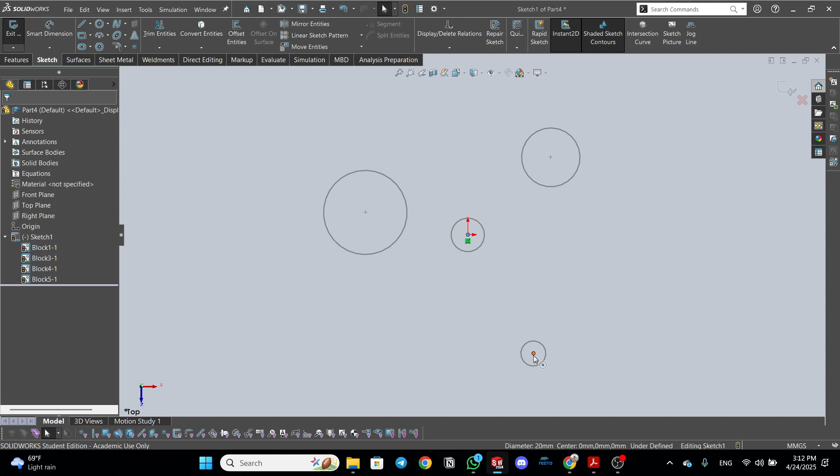So this is wrong, we'll delete it, and make this circle a block, and make this and this too. So let's define the position now and make this in the center line or the center origin point.

So each step of defining the dimension is crucial. If you don't do that, then the question or the answer will be wrong.

I think all of them are fully defined. No, they are fully defined, but they are rotating about the x-axis.

So now let's add the belt and chain. Here we see that the thickness is 15 millimeters. From Tools, Sketch Entities, Belt and Chain, or you can search it, or you can use a toolbar to select the command.

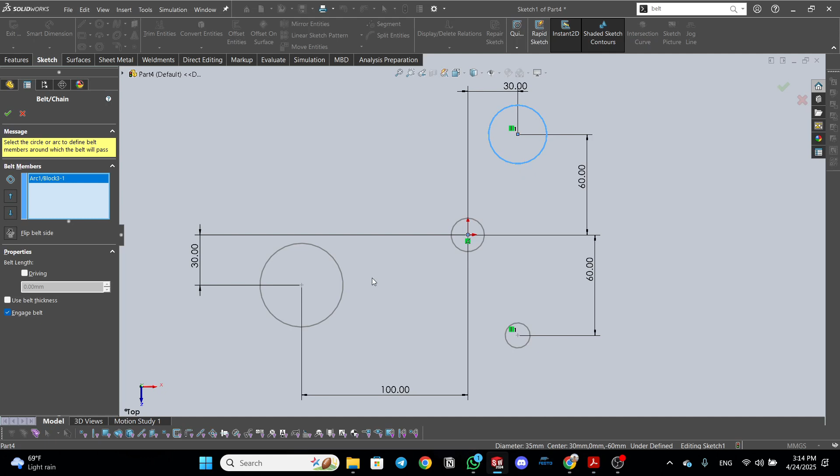Either one is fine. Now we have to select the pulleys, and the arrangement of each pulley is crucial to have the shape of the belt. So this is the shape.

Yes, and we have to give a belt thickness of 15. So this is the first question, and all dimensions are good. Now we have to get the belt length, which is written here, 640.24 millimeters.

Basically, a question could be like that. It is not hard, but you have to know the basics of belt and chains and blocks. So this could be one of the questions.

The second question - before we get into it, I have to emphasize that equations are important. If anyone intends to go to CSWE, they probably passed CSWA and CSWP also, so they know equations and the SolidWorks procedure in all the exams. We have to enter some kind of equation for angle or dimension, and we will use it a lot to modify some parts to make a part easily modifiable.

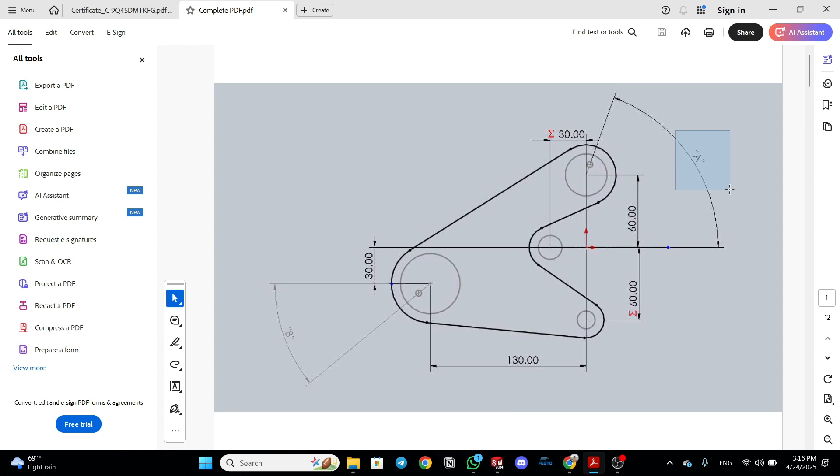See this question - I'm the one who made it, so it is not perfect and doesn't have the best layout like the exam. But I will tell you the idea behind it. If we have this angle, let's make this block, let's modify it.

We have a circle here. The angle is 45. Very good.

So there is a command in Edit Belt which is Engage Belt. Let's make this clear. Make a circle here, doesn't matter where.

When we rotate one pulley, each of the pulleys rotate as well. So when this pulley rotates like a 30 degree angle, this should rotate also a certain angle. We don't know what - it is a ratio between the diameters of the pulleys, but that's not the case now.

We will just determine the angle as the exam said, like this will be A. And we will add a circle in the second pulley, and we'll determine what he wants in the exam - the angle of rotation of this pulley that happens because of the rotation of that one. So using equations is important to know in all the exams.

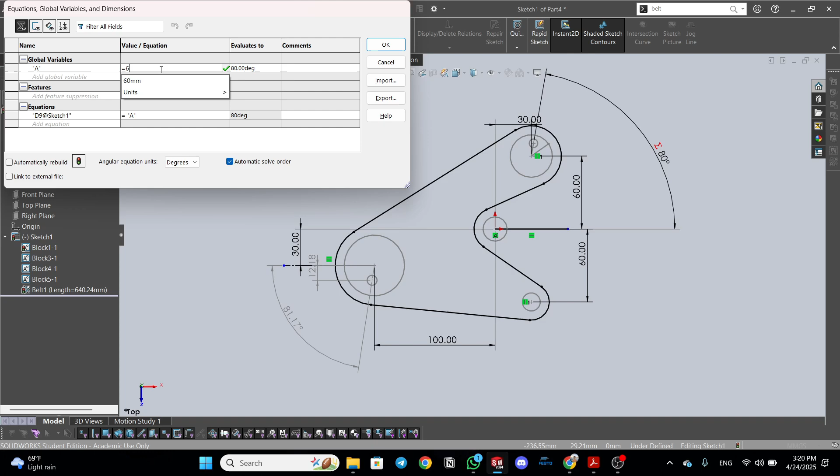Like this will be 80, now it will be 60, and to see the new number or the new angle of B - he will want to know angle B, and angle B will depend on angle A. So that could be multiple questions actually.

Very good, so this is the first question. Let's save it. Whenever you solve a problem on an exam, save it so you can revise it later, or revise your exam afterwards.

So this is question one, or topic one. It is one topic, but he could give you three questions about the same topic.

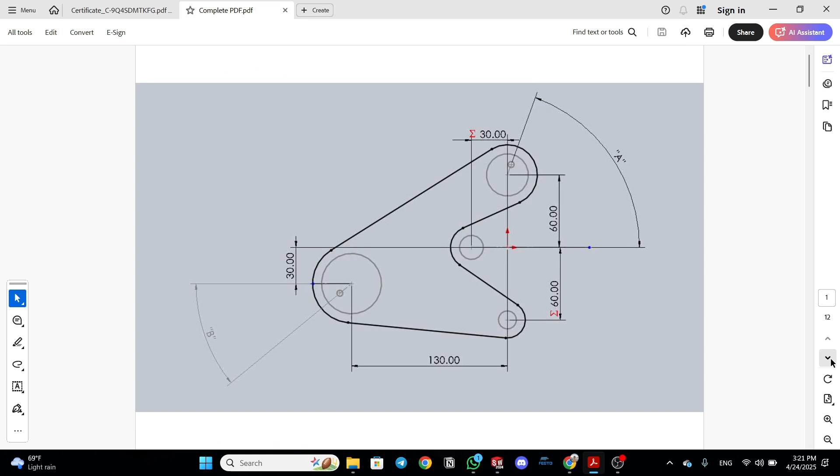So the second question is actually 3D sketching, which I count as hard if you don't know the optimum way to solve it. So let's see the sketch.

So we have a 3D sketch here, the isometric view, and here the top view, side, and front. From where should we get started?

He gives you the dimensions of the back of the sketch, the one on the ground, so we can start from it. I will start with the easier way to solve it, then I'll go to the not so popular way to solve it.

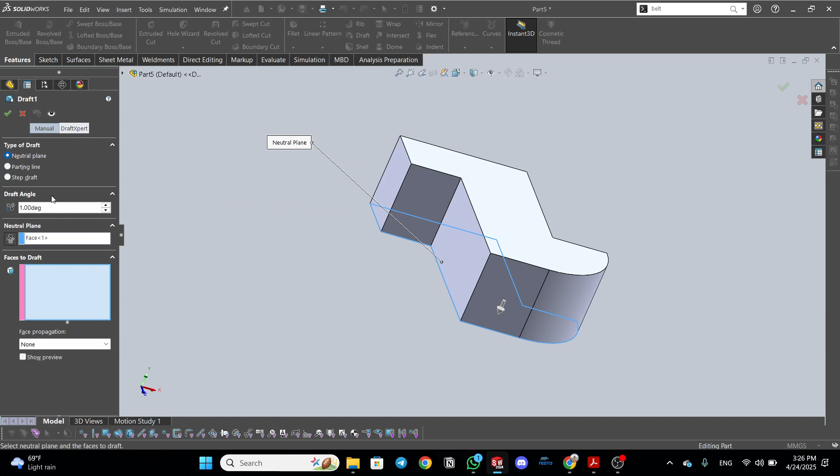This face and that, and the draft direction will be reverse. Yes, yes, this is it. So if we see...

It is perhaps some kind of, it does look like this shape. This is 70 degree if we look from there.

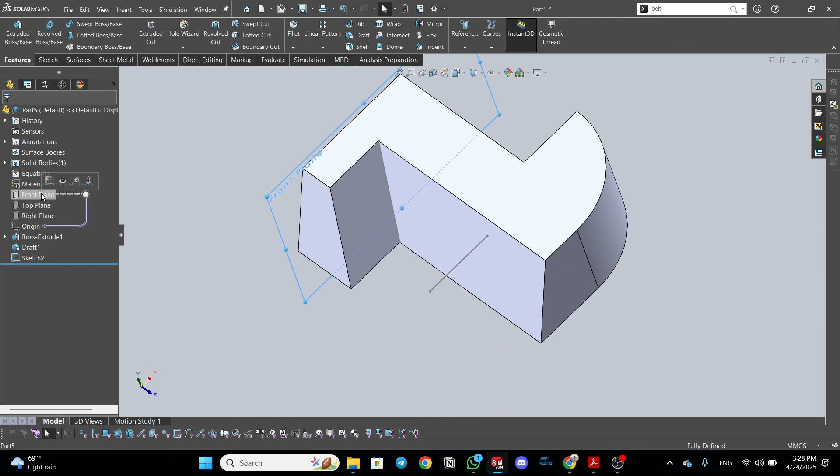Angle in this face - I want to convert that line and that line and see the angle. Yes, it is 70. So if we projected the lines or the draft lines on a face perpendicular, which in this case is the view itself, the elevation view, it will give us 70. So this is what draft makes.

So these are the faces that have inward draft, and the other faces have outward draft. This only face, check - yes, and this straight.

It was 80 degrees, so 90 minus 80 is 10. And the direction of the neutral plane is the one in the back. And the face the draft is this, and the direction will be like this, which will make the draft outward.

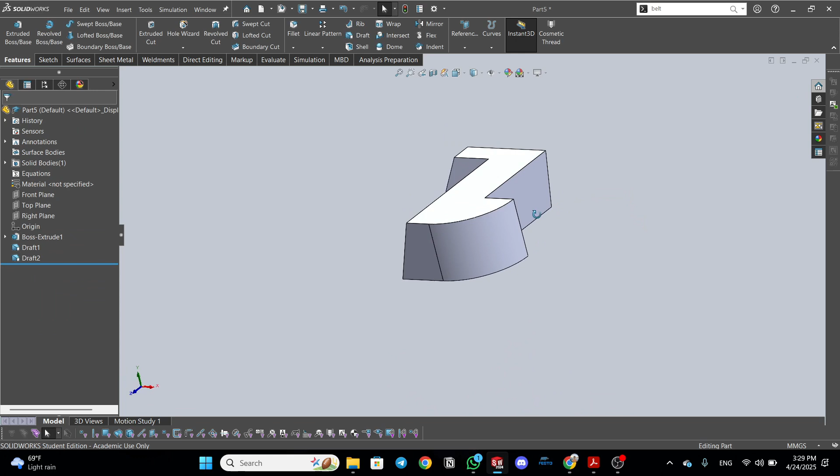So this should be our shape. We have to check. Let's see these angles - this one, convert, see, it is 70, this one is 70, we want to see that one.

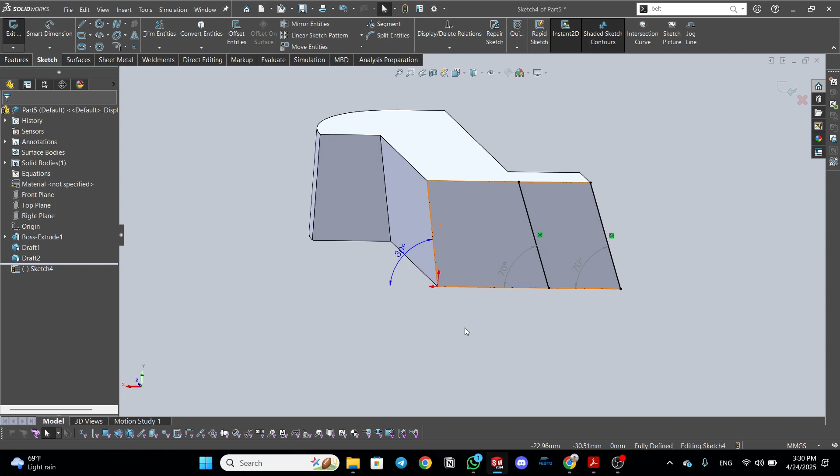It is 80. Yeah, it is correct. So now we checked in a plane perpendicular, or a plane that is equal to this view. The dimensions are correct, so the draft way is good.

If I draw a line in 3D space and want to define it or fully define it, you have to give it a length, an absolute length, and two angles - an angle between the first line and an angle between the second line. So to define each line in this part, two angles and one dimension, it will take a lot of time and is not accurate like the way of the draft.

So to define only a single line, you have to do three dimensions. So it is not the most accurate way.

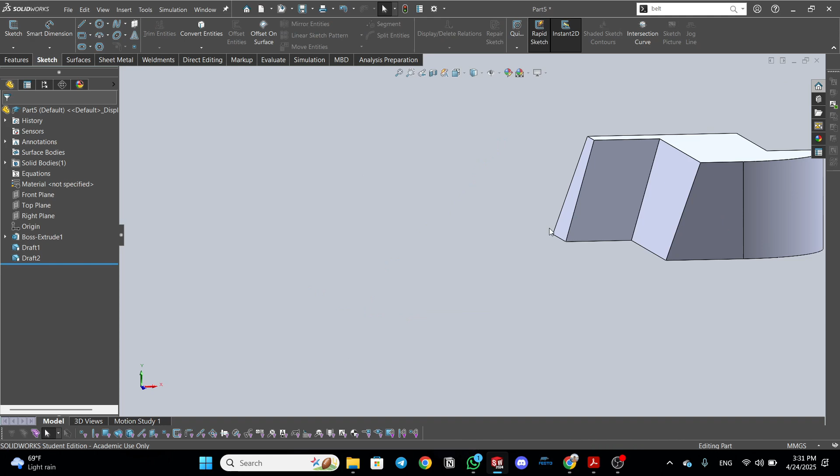Now we have the shape. We want lines, we want only lines. So the lines that represent the question are the edges of this part. So we want to select all the edges and delete the body. How can we do that?

First, we'll open a 3D sketch and want to select each edge - first, second, third, and so on. But this is actually a time-intensive way. There is another way by using filters.

You can right-click, toolbars, selection filter, and put it in any place. There is a filter for edges. You can use a selection box on all of the part. It will select only the edges. But there is a problem. It will not select the edges that are not shown.

So we have to select it again. Or we can just select all, or Control A. It will select all the edges in the part. After we've selected, we can convert these edges, exit the sketch and exit the filter also. So now we've converted all the segments or the edges of the part to a 3D sketch.

Now we want to delete the part from direct editing, delete body, delete, and here we have the shape of the part. And we have validated that these lines or these methods are good by checking the angles.

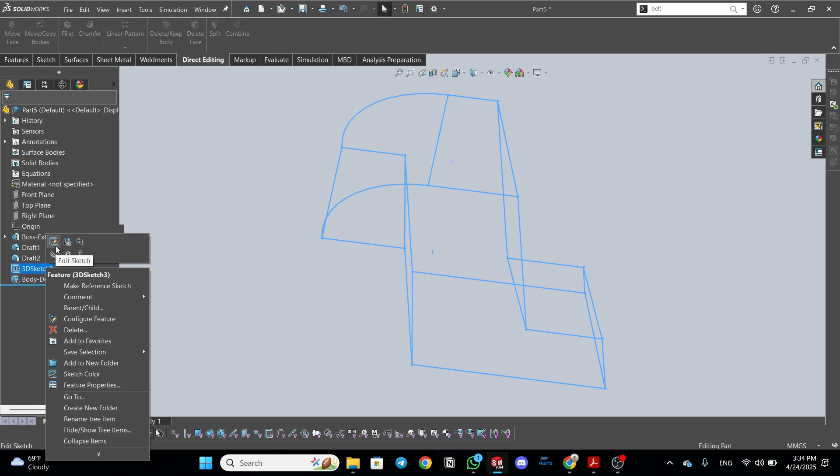Entering the 3D sketch, we can Control A, measure, and here it is, the total length of all the edges. From evaluate, measure. Oh, I have a keyboard shortcut. So this is the total length of all the line segments, 2225. So this is the answer to this question.

So the tricky part of this question is doing it by adding drafts, then converting the edges, then deleting the body, and measuring the length of all line segments. This is one of the tricky questions. So this is a good idea for a question. Let's see another one.

We can add a weldment to the line segments, and he wants us to check the mass of all segments. And there is a cross section, which is a hollow circle or hollow pipe, 20 diameter.

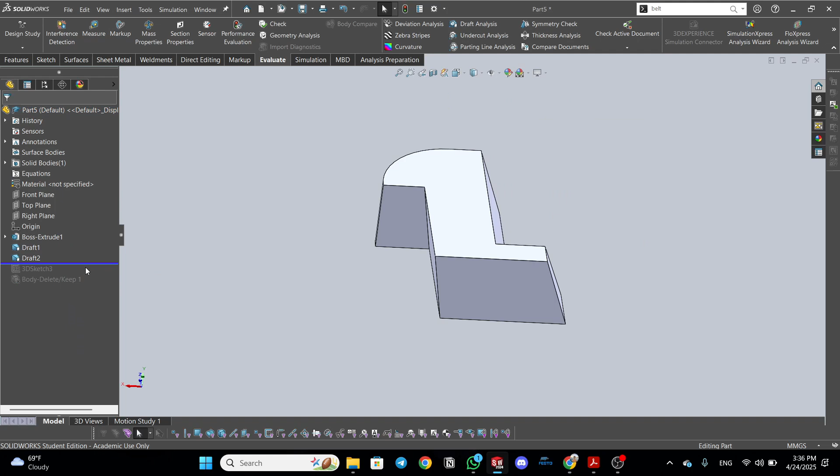So the command delete or keep bodies is one of the commands from direct editing. Direct editing is the tab that has a lot of specialized modifying tools. So we can move a face or move a body or delete a face and so on. One of the commands is that we can delete the body itself without breaking the relations it has.

So it is different from selecting the body or clicking on the body and pressing delete. When I did this, all the relations and dimensions that were related to the deleted part are omitted. It is gone now. So the command delete body deletes the body, but keeps all the relations it has.

So when I press the delete key, the line segments are gone. But if I use delete body, the line segments I had are still here. So all the relations are still good. That's it. I hope this is good. Okay, let's go for the second question.

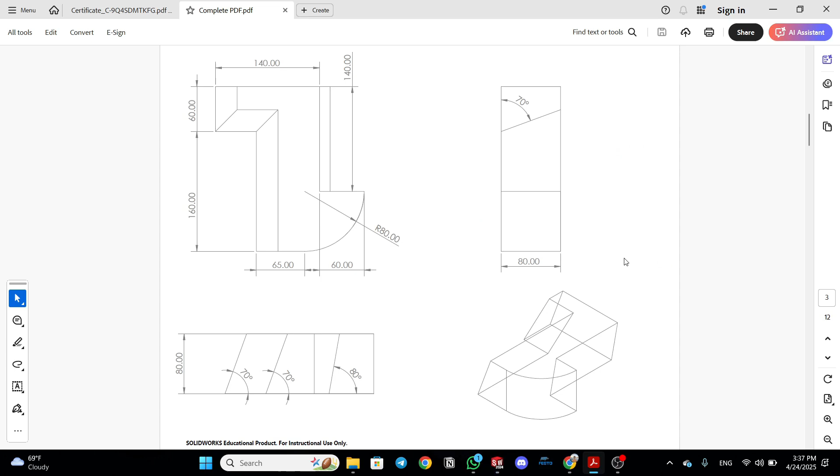Adding weldments. So in this question, he wants us to measure the mass of the part or the mass of all segments, adding a weldment or structural member. The structural member is defined by this cross section. It is a hollow circle or a pipe, 20 diameter, and the inner diameter is 12.

So we have to know how to make a sketch that we can use as a structural member. Anyone who passed the CSWP weldments will know how to do this. But we will redo it. 20, and the other one is 12. And we can add insertion points from there to there.

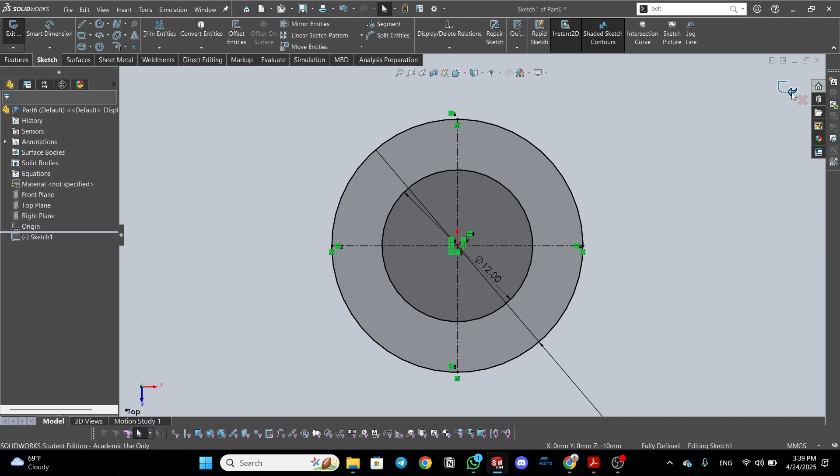Press enter to do the same command. Now we have 5 insertion points. We will need the insertion points when we select the structural member. So the line segment will intersect the profile at one of these 5 points: this one, one of the 4, or the center. So this is a defined sketch. This is the sketch he wants.

So press on the sketch, file, save it as a library feature part. And you have to save it in the path of the design library or the path of the weldment sketches. You can get it from file locations, weldment profiles, and you see the path it has. This path is the default one set by SolidWorks itself.

So you can save it in this, or I customized a path for myself. Either one is fine. If you save a part in either of the paths, it will appear automatically in the structural member profiles. So let's get back, file, save, library feature. It is hard to find. Then I will save it.

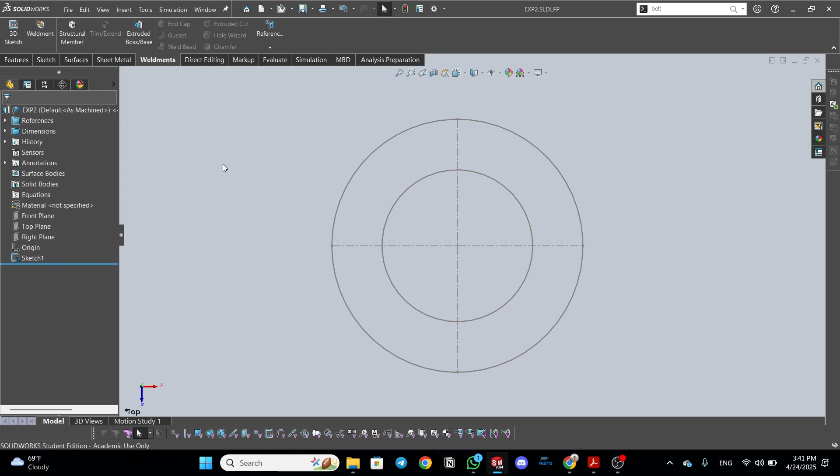Very good. So it is saved now. The extension is renamed, and the sketch has an L sign on. That means it is a library feature sketch, and also the icon here indicates library feature. So let's close it, Control W, and add the structural member, custom profile, metric. It is already used, metric, exp2, and let's use it as it is indicated here.

From all line segments, and this is good. We have to add a material. You can right click, edit material, or you have a keyboard shortcut. And the material it has is alloy 1060.

Now we have to measure the mass of the part. We can from Evaluate, Mass Properties. But we have to check this number because there is some kind of a glitch in weldments. You have to select all the bodies, then measure, then have its mass. So 437.

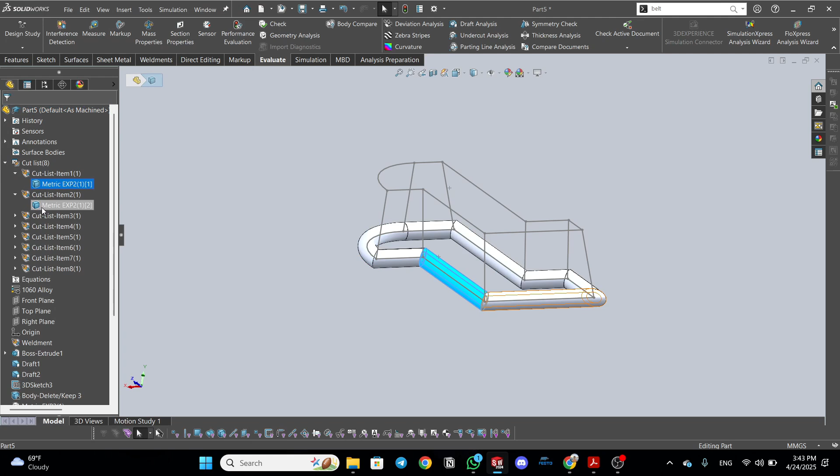Oh, that's correct. But in some cases there is a glitch that the two numbers are not the same. So you have first to check you've selected all the bodies. Either from there, Control, Shift, click, mass properties, and take the number 437, or from cut list. No, you have to select each one from the cut list and so on. It will give you the same answer. So this is the answer of this question.

The second one is he wants to add all the segments, and he tells us that there are three corners that have special treatment. They are all mitered equally between the segments. So in each corner there are three segments. Each corner of the three is mitered equally across the three pipes or the three segments. And we use the same profile.

We can add a new structural member, or we can continue on the same structural member, but it's much easier to control the corners if we are working on the same feature. It is accessible though if we made a second feature, but it is easier to control it on the same feature. So we'll make a new group, select the lines. There are two conditions for a group. The group must have continuous lines, or it must have parallel lines to be in one group.

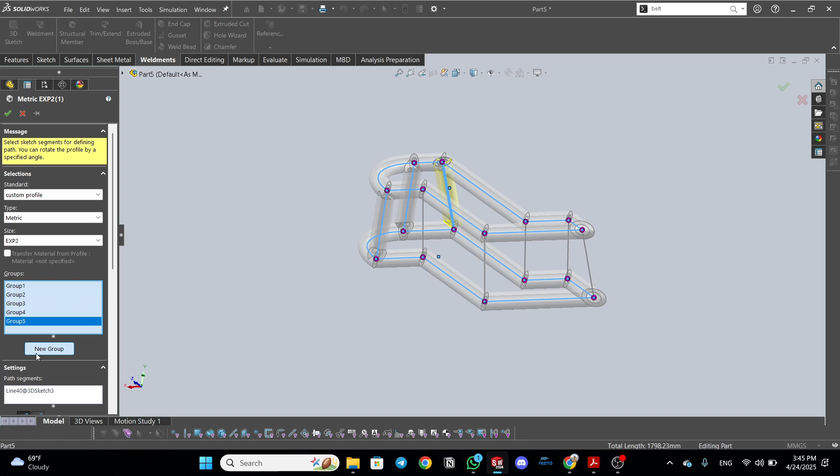So group 3, I can't select another one because they are neither continuous nor parallel. So I'll make a new group for each segment of this. Not all of them. 4 isn't. And this, only this. So these are the line segments. But I didn't control the corner. This one, and this one. So we'll edit the feature again and see the corners.

Oh, no, it is my fault. The group selected is wrong. This one, this one, this one, the back one. Yes, these are the correct segments. Now we have to edit the corner treatment.

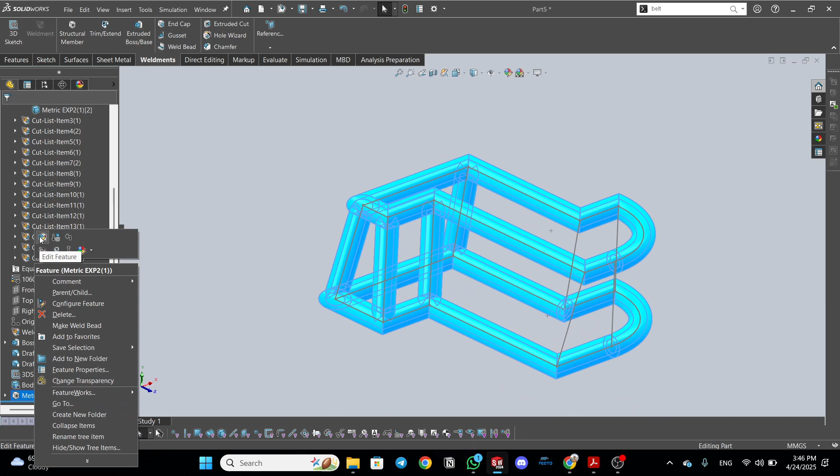So to edit the corner treatment or make it equally mitered, we can click on each joint and specify the corner treatment of each joint by making the trim order equal. Either trim order 1 and 1, or 2 and 2, you have to make it equal. So this is equal. This one is equal. We'll make it 1 and 1. And this one is also 1. So check yes. Now we can see that all of them are mitered equally.

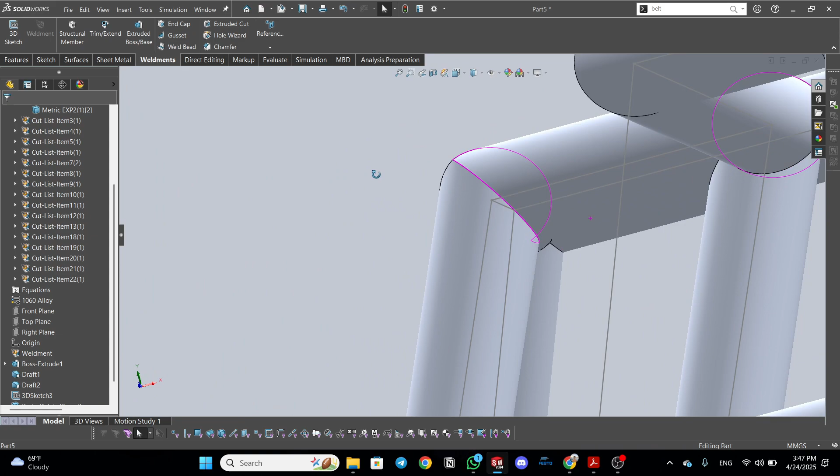Like this. This isn't mitered equally, but this is. This is also. So what is the mass of all segments? Now we can measure the mass. 990. I have to check that. It is the same number, 990 grams. So this is the answer of the fifth question.

So these are the questions for 3D sketch and weldments. It is a good example. And yes, the material we've added, 1060. Very good. So this is another question. Let's see another one, which is modeling a spring.

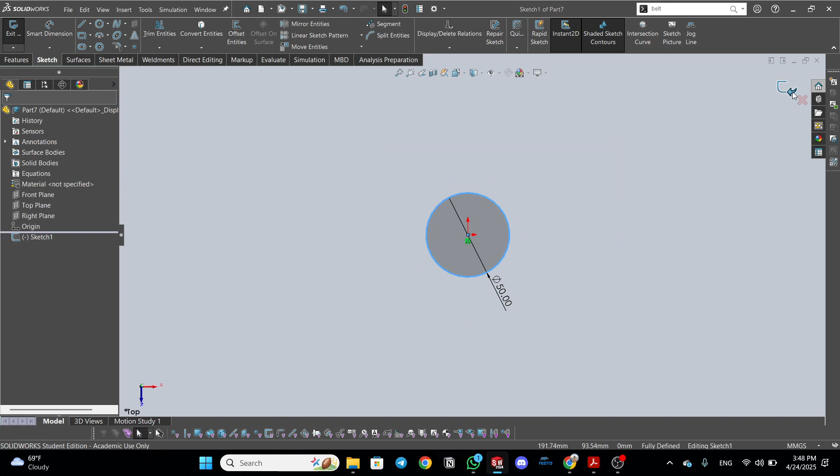So modeling a spring has a lot of ways actually. We can add a circle of a certain diameter, and from this circle we can add a helix by a certain height or pitch. By this way we can make a spring. But in this case we can't make that profile. It is not accessible in this easy way.

We can actually do some modifications like make a taper of a certain angle. Oh, that's too much. Like that. We can make a taper, but it will not lead us to this shape of the spring. So we certainly need to figure out a new way to make it. So let's see.

The spring diameter is 10 millimeters, and he gives us the profile that the spring is constrained to. So this way is called intersection curves. We can make the curve of this spring by an intersection of two surfaces.

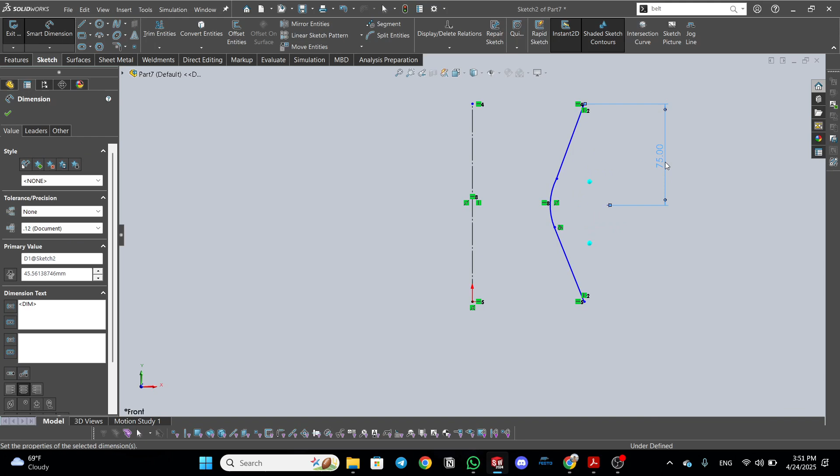So let's see. Here's the center line. Here's, wait, this one is already defined. No, 150. These two are horizontal. Yeah, it is overdefined. And the radius is 40.

The 160, 100. Yes, it is fully defined now. Let's check the dimensions again. It is correct. So this is the first surface we have. We will do a revolve surface.

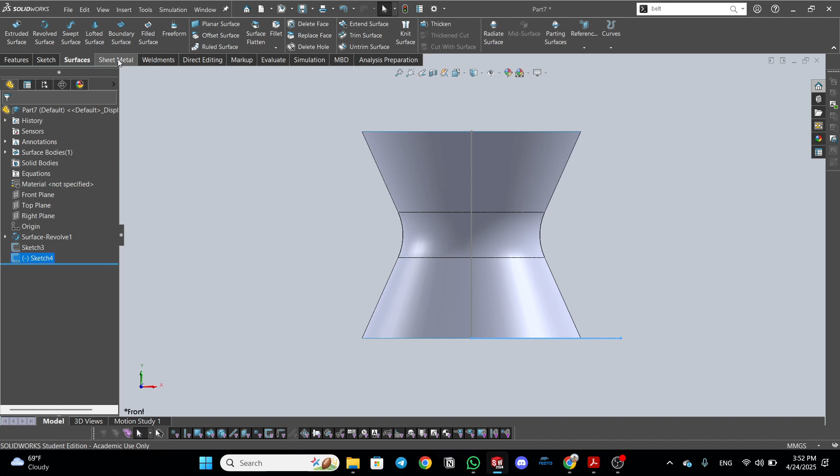Very good. So for the second surface, to get the curve of the spring, we need something that has a pitch that represents the spring. So let's see. We can make a line and another one. Very good. So this is pretty counterintuitive, but I'll make a sweep out of this in this path with a twist angle.

We can specify the twist angle by degrees or revolutions or radians. In this case, we don't have the twist angle, but we have the revolutions. We'll just count how many revolutions are there. First, second, 2, 3, 4, 5, 6, 7, 8. So 8 revolutions.

Oh, very good. So we've made the sweep or the pitch surface, and we made the shape that constrains the spring. Now all we want is the intersection between them. Let's open a 3D sketch. There is a command called intersection curve. We can search for it and see where it is. It is under convert entities.

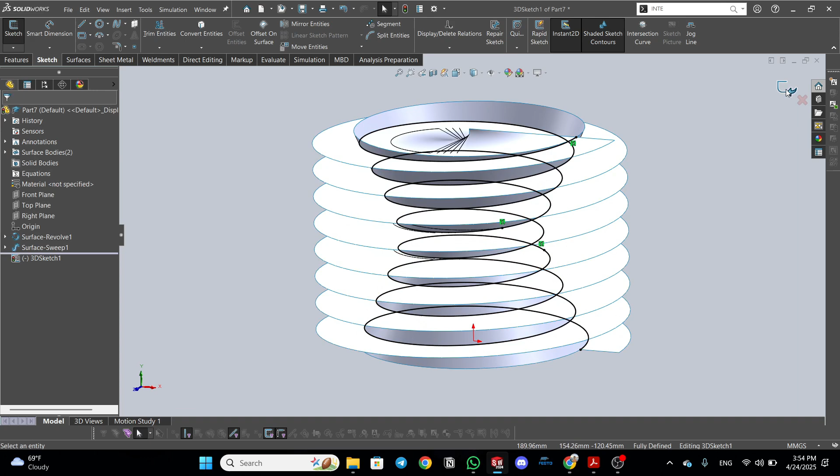I've made a single icon of it, an intersection curve. The first surface and the second surface, I have to check all of this. And here it is, the intersection curve. Now I don't need these; I can either delete them or just hide them. So this is the spring curve. All I want now is adding the profile, a circle 10 millimeters in diameter, and make a sweep.

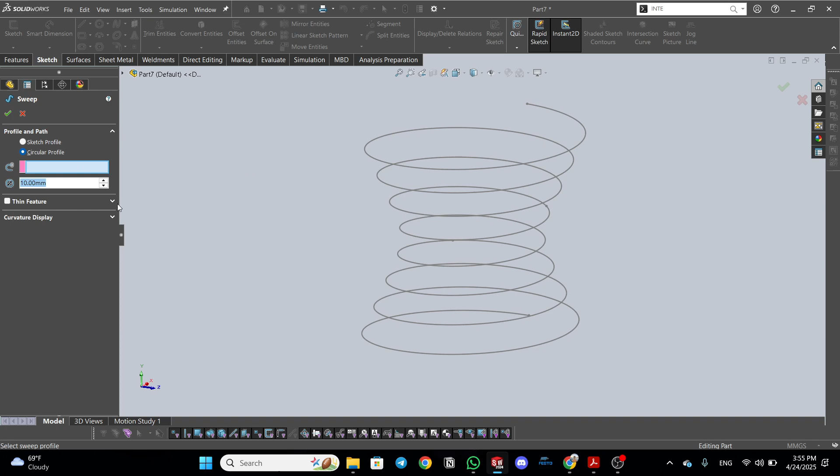This is called shortcut, by pressing the S key, and you can add all the commands you want from shortcut bars. Just drag and drop. So let's add a sweep. We didn't actually draw the profile, but it is okay in this case because there is a separate option for circular profiles. All I want is adding the diameter. Very good. I added the diameter and chose the path, and we are all good now.

So the material, 1020, apply material, and we have to measure. So this is the correct answer. This is actually one of the hardest ways to model a spring. It is good for intricate shapes that you can't do by a helix or a tapered helix and so on. You could make it more complicated by doing a composite curve.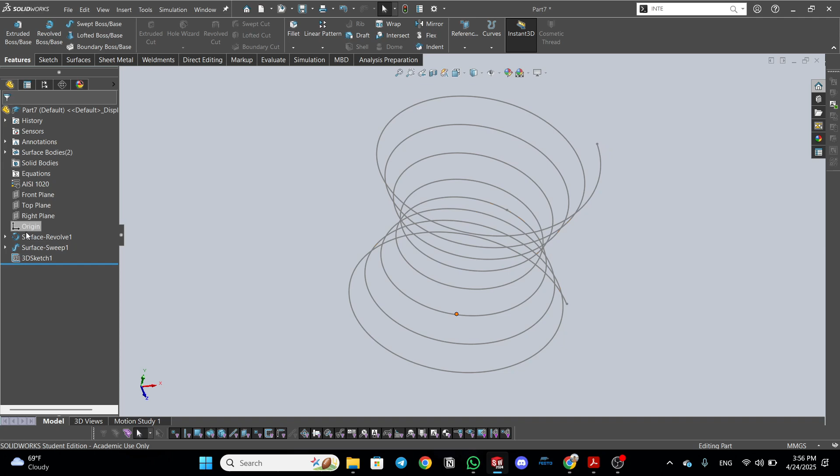Let's leave this for now. By making a composite curve, you sketch on this and add, let's see, a quick example. XY plane, one XZ plane, and add a curve, another one, tangent, and make another one in the XY plane. Very good. And these two are tangent. So this is a separate curve. It is a composite. Let's see if the sweep will do it.

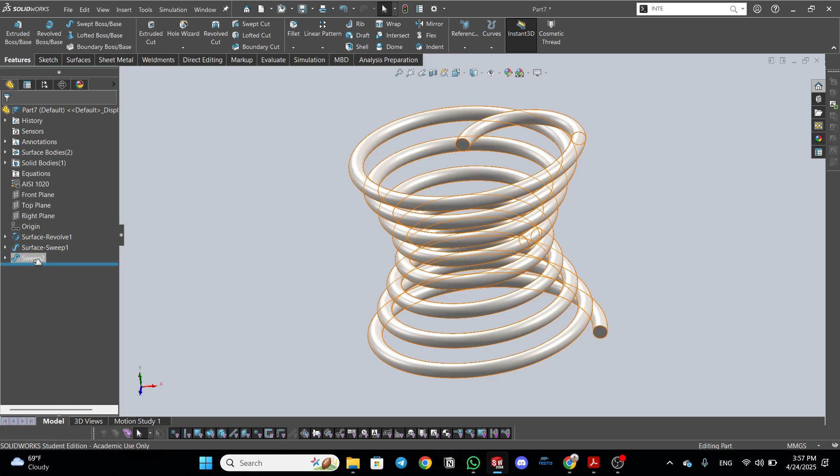So what was the problem? Okay, so we can make a composite curve by adding more curves to the part or to the sketch. If it is a sketch, then it is not composite, but there is a single command, composite curve, that will combine all the curves together. In this case, it is not composite. So this is one way to do it. Let's get back. Very good. So this is our part.

So the next one is sheet metal. Let's open the part and save. The problem here is that the sheet metal is not defined as sheet metal. It is an imported part, an STL or STEP file, either way. So we have to make changes so that SolidWorks comprehends that this part is sheet metal, and this is easily done by the command convert to sheet metal.

First, we have to select the fixed face, which is the base flange compared to the commands we have, and the bend edges we can select manually, or automatically by pressing collect all bends, then pressing OK. Now we have the part defined as a sheet metal part. We know that because SolidWorks can now flatten the part, and we can get the flattened length he wants in the question, X.

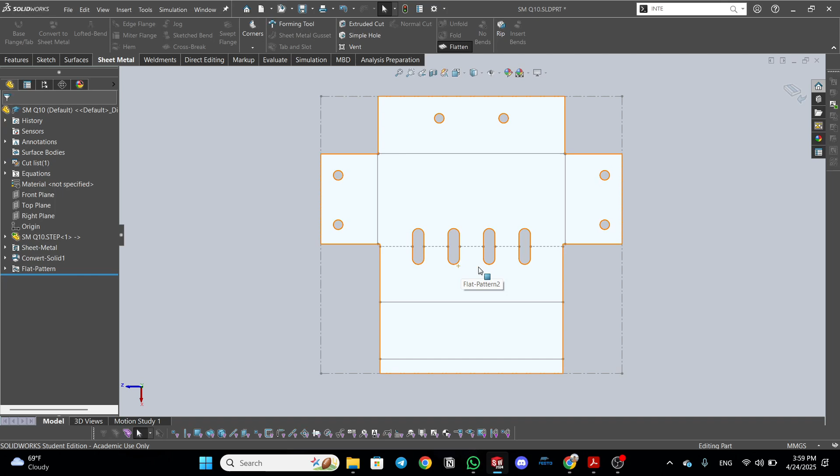So the answer is 288. You can measure it from Evaluate, Measure and click on this, or you can just from the cut list, the sheet icon properties, the length or the width is 288. So let's unflatten that. Let's see the second question.

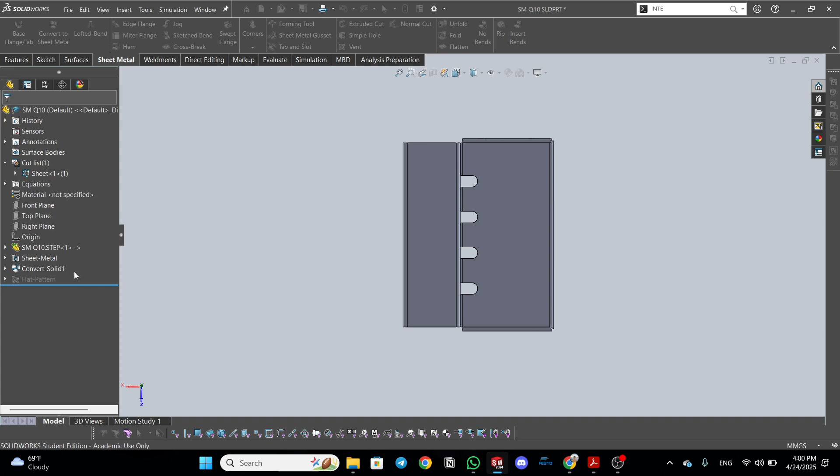So all the trick in this part, we have to, oh, there's an important thing I forgot, is we have to define a K-factor. In the question, it is 0.4. In the exam, it will tell you to put a K-factor of a certain number. And we forgot also to add the material, which is 1020. And this is the correct mass. So this is the first question.

The second one, apply modifications to the part, then determine what is the part center of mass. So if we see there, let's see both views. He added slots here or cuts in the bend, and these slots or these cuts are reduced to 2, so these ones are deleted, and also the width of the cut is reduced. So there are 3 modifications actually. This could be 2 questions, not 1 question, but we will solve it in 1 question.

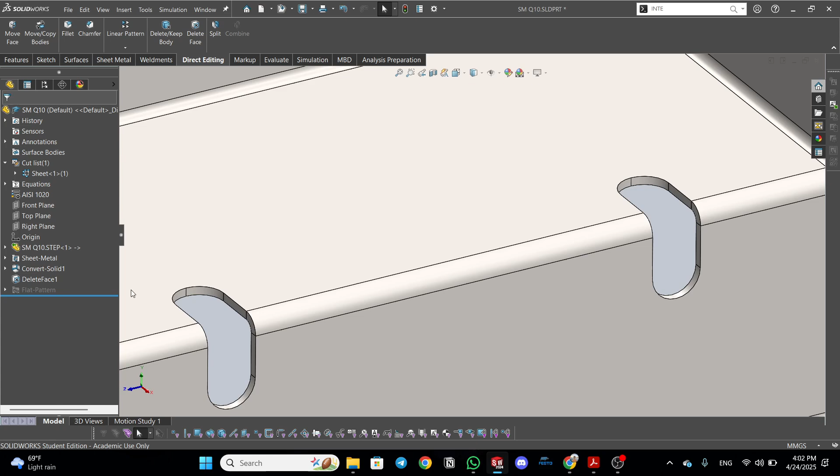So let's start by modifying these slots, deleting and modifying the width. How can we delete this? Let's see. Direct editing. We have a command called delete face. So let's select the inner faces. 1, 2, 3. This is the manual way. There is a command called select tangency, and delete. Can flatten to check if there are errors. There is not. And we can also modify the cuts.

The problem here is that there isn't a feature tree manager coming from this part. This is a STEP file, so it doesn't have a feature tree manager. So we can't go into the feature and edit the feature and reduce the width. So in this case, direct editing commands are a great help. So let's see the move face command. Move face has 3 options, either offset, translate, or rotate. In this case, offset will do the job.

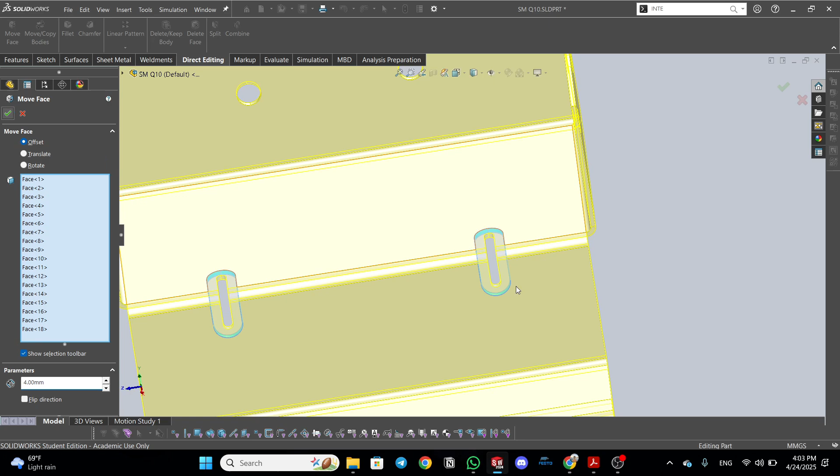Select tangency, and 4 millimeters the width. What was the old width? 12, so it was reduced by 8. Select tangency, so we'll reduce it by 8. Let's see, there is a preview, flip direction, half of 8, because he's reducing 4 millimeters from there, 4 millimeters from there, combined they are 8 millimeters. So let's check the width again. Yes, it is 4 millimeters. So this is the second modification. We've deleted and modified the slots here.

Now we want to add new slots. Rectangle 20 by 10. Let's see how we can add a cut in the bend. There is not a normal plane or a suitable plane that we can cut. So we have to unfold the shape. So sheet metal, unfold, this face, collect all bends. Now we have a flattened shape, but we are not in the flatten command. This is what unfold does. So let's sketch 5 rectangles, 20 by 10.

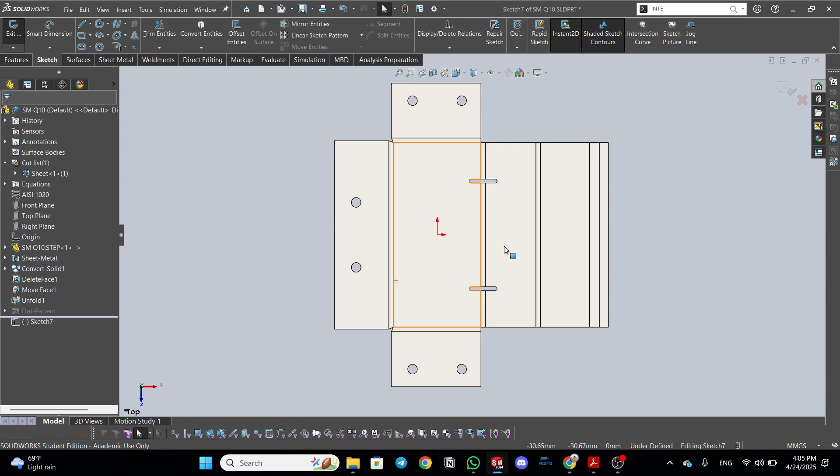And this rectangle is in the center of the bend. The center of it is on the center of the bend, or on the bend line. So let's get the center of this and make it vertical. Very good. Still this dimension, 30. Now it is fully defined. Now we just need to add the linear pattern, 5 instances and 30 millimeters from there.

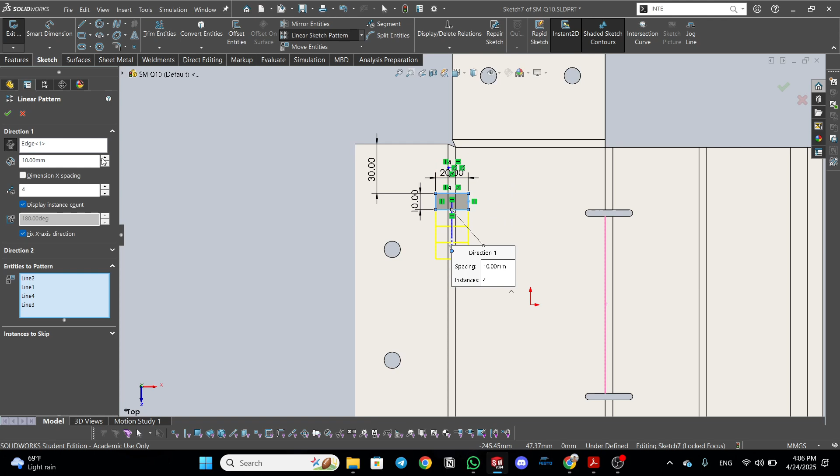Linear pattern. The X direction isn't for us, so we'll modify it. This line, entity to pattern is this rectangle. We can select each line individually, or if we have the shaded contour, we can select the whole area by just pressing in between. So 4, and I will not fix the dimension X spacing because I will define it from the other edge. So this is 30. Now this is a fully defined sketch. We will cut, and we can link the thickness.

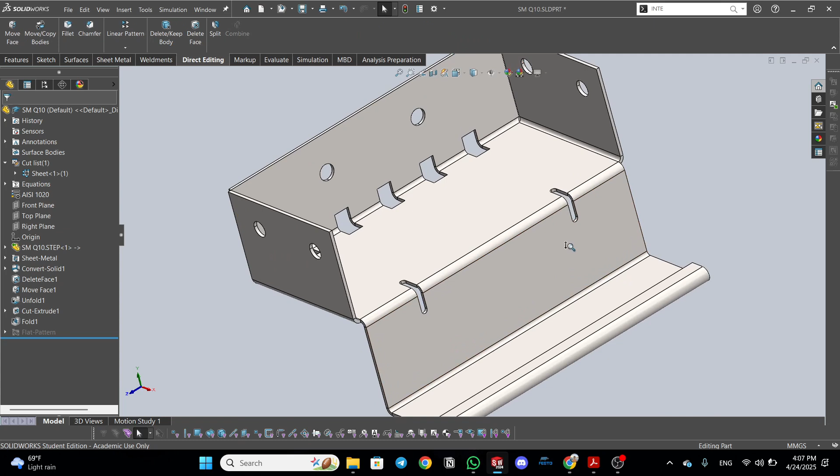Now after we've cut the model, we will fold again. This face is fixed, and we will collect all bends again. And to see if there is an issue, we'll flatten. There is no error, so this is the correct part. So we have to measure the mass, and this is the correct answer. So this question will be easy to solve if you know the direct editing commands like delete face and move face. It will be much faster than any other method. So this is the eighth part.

If anyone was following chess, you will know that meme. The rule.

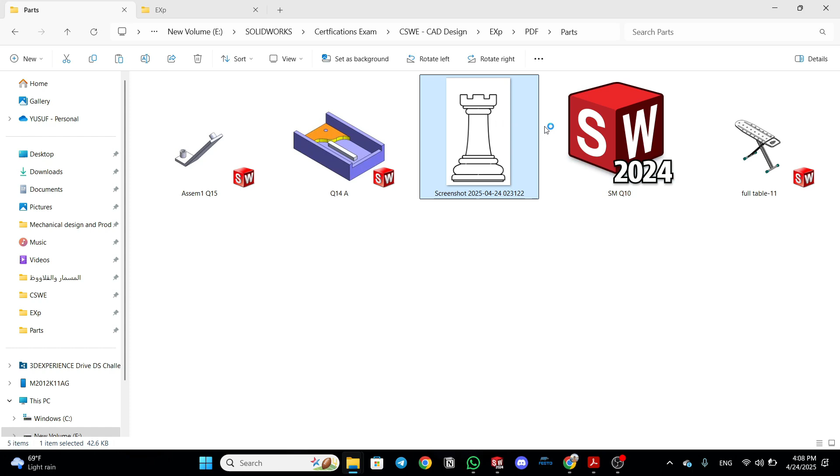So this part is: use the provided picture to capture the part shown and determine what is the mass of the part. So this is a sketch picture command or sketch picture question. The picture is here. This is the picture, and we have to take the shape of the rook and model it on SolidWorks.

And by the way, this is a method used in reverse engineering. It is pretty basic actually, but if you want to reverse engineer a bottle or so, a water bottle, you can take a picture of it and insert it on SolidWorks and make the curves of it.

So we'll select a plane, front plane. We can search sketch picture, and see where is it. I have it, but we can search from tools, sketch entities. It is somewhere there in tools or insert, but I have it here, or you can search it if you don't know where it is located. So sketch picture, we'll add a photo.

And this photo is not scaled, so the program doesn't know any length of this picture, so I have to give it a scale. In this question, he gives us a scale, which is this number, 90.58 millimeters. So this is our scale. This is the scale tool. Put it in the first place here. So this is the start, and the finish will be on the top face of the rook.

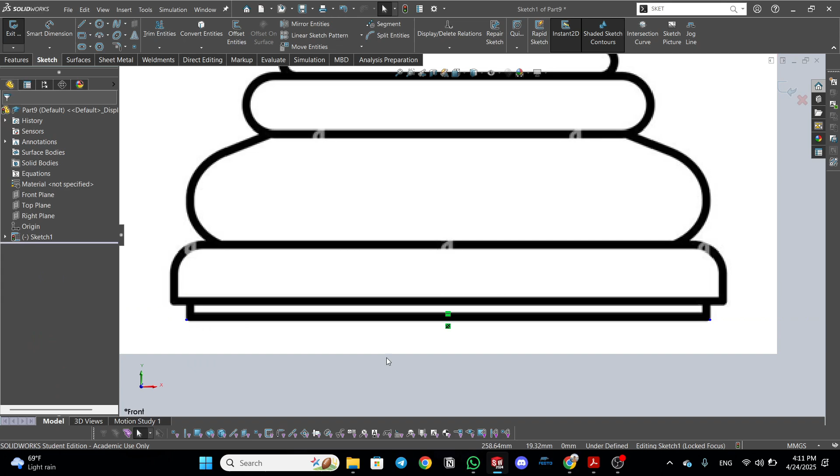We can revolve it because it is a revolved part. We want the center line. Just make a line from there to there and fix it. And the midpoint of it is the revolve center. Very good. I'll just make it fixed on the top.

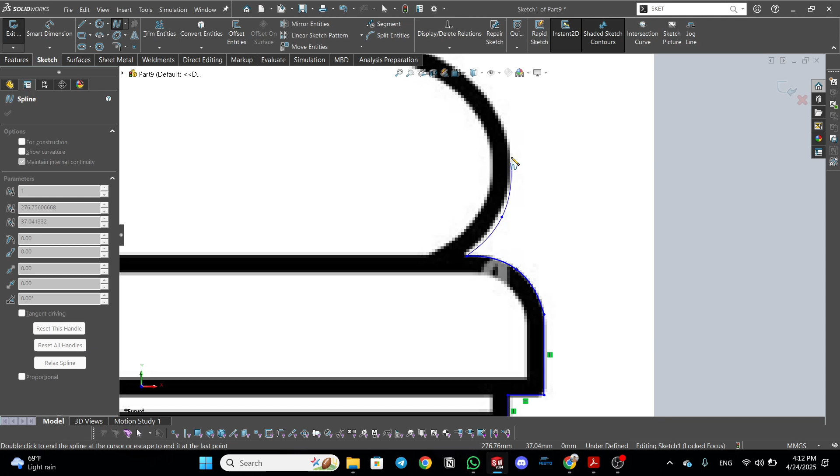So now you'll have to draw on the lines of the picture. Any straight part, you can draw it by a line. And otherwise, you can draw it by a spline. So we'll continue by spline. First one, enter. The second. You have to make sure that you are taking the shape of all the edges.

In this kind of questions, there will be an error margin which is quite large. Normally it is plus or minus 1%, but in this question, because the error is much more, it could be minus or plus 3% or 4% or so. Let's capture this and add a line, make tangent, and this is spline again.

Line. It's quite boring actually, but it is the only way to do so. And here we have a line, and we'll close the shape. And this is horizontal. Very good. So we've closed the contour, and we will make this solid line. Now we will revolve.

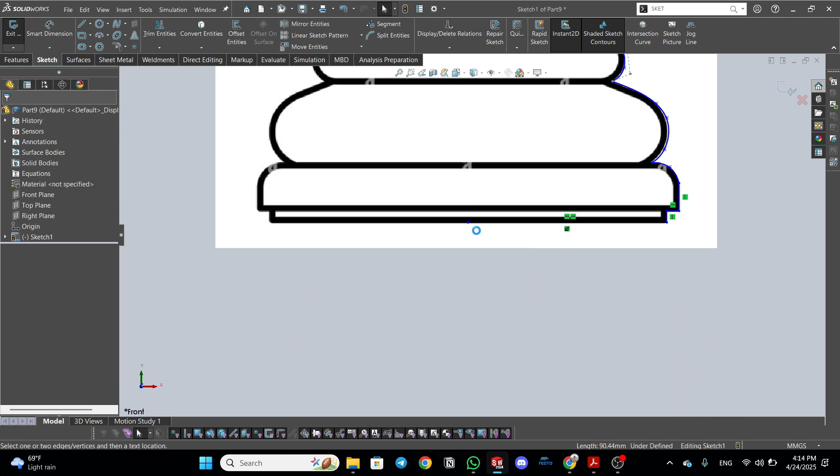Might be an issue. Wasn't an issue. So this is the shape of the rook. Now all that is left is the cuts in the top of it. So it is a rectangle 6.5. We'll just draw on any plane. 6.5. The depth is 5.15, 6.5, and we'll make this in the midpoint

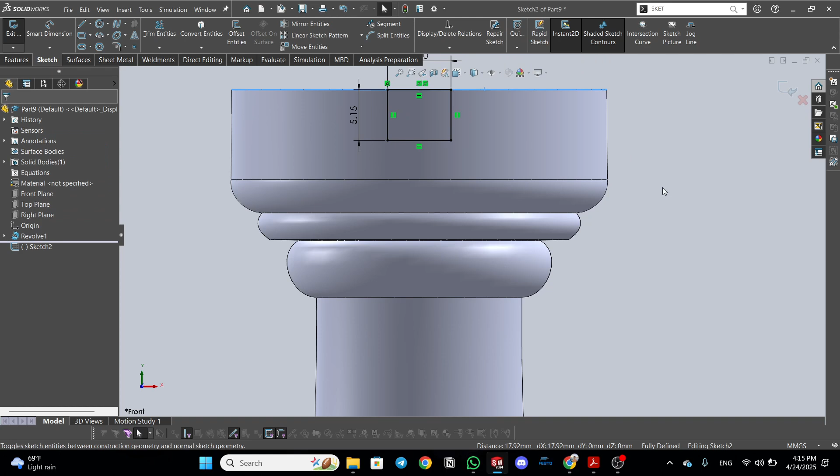of this line. Now we can extrude cut through all, both directions, and we can make a circular pattern of the same feature twice. Doesn't matter. No.

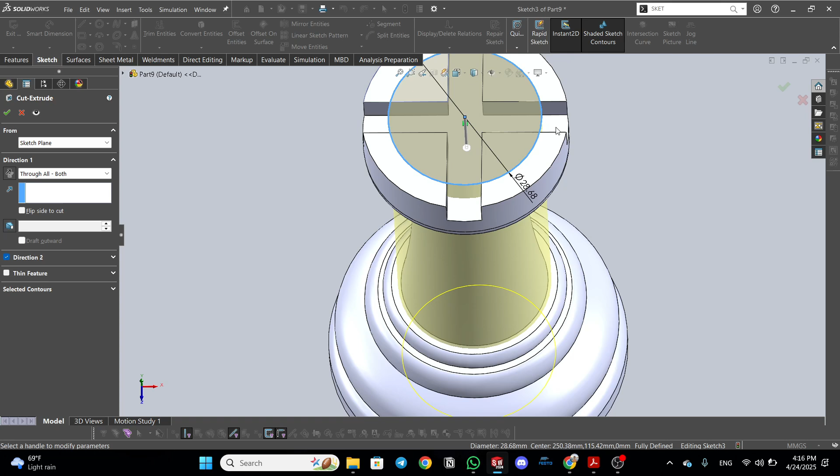Very good. So the last cut is this radius, 14.34. This is the center, 14.34. This is the radius, right? Multiplied by 2. So extrude cut. And we can double click on this surface. It should work. Cut the surface. And this is the final part. We have the rectangle cuts, and we've captured the part from the picture.

Now we can add the material, ceramic porcelain. Shift M, ceramic porcelain. Now this is the final part. We can measure the mass, and this is the correct answer, 190 grams. So this is the ninth question. Still 1, 2, 3 questions left.

Now we have a topic which is assembly modifications. So you have an assembly, and you could make modifications in the assembly as an in-context feature, or just edit the part. So this is what the question is talking about. In this question, the assembly should be provided. You will not model this assembly. So let's open it.

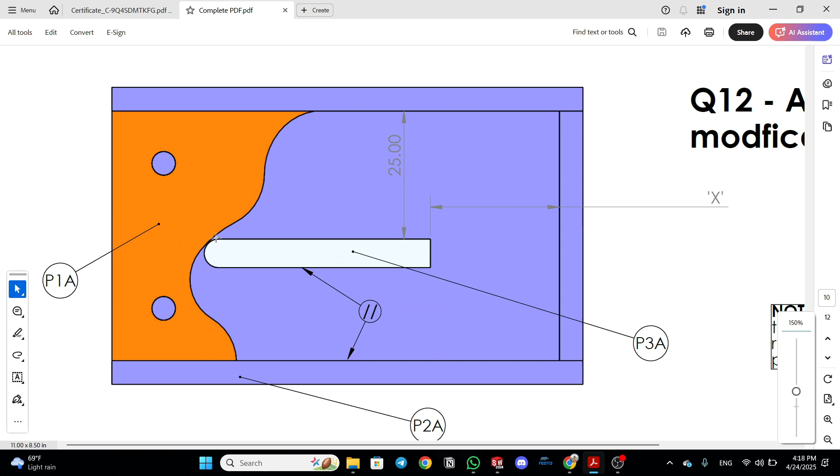Okay, so let's read the question. It tells us to make the circular face, indicated as P3A, always tangent to the faces mentioned. These are the faces mentioned, the yellow faces. P3A should follow all the tangent faces, which is indicated by yellow, on P1A.

So what is the problem now? If we get into the assembly, there aren't any mates. So first we will make the mates: coincident. And he tells us that these two faces are parallel. So I can move it freely.

I want to make this face tangent to all of these faces. There might be two solutions. CAM, which is not a valid solution, because mechanical CAM requires a CAM path which is closed, but this is open. So we can select CAMs, and it will not select because it wants a closed entity.

So the other way is making it tangent, but we can't make it tangent to all the faces. We can make it tangent to just a single face, either this. Oh, this is not. We have to make it fixed or fully defined.

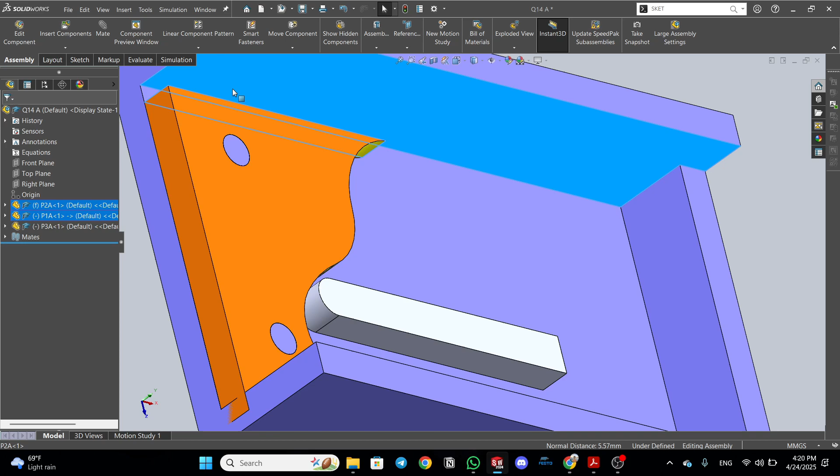These two faces are coincident, so it is fixed. Now we can move this. It is following the path, right? But whenever it gets into the second face, it will not move it. It will not be tangent to it.

The same thing if we make a tangent mate from this and this, it will also not follow all the paths. So what is the solution? One of the solutions is making all of these surfaces a single surface.

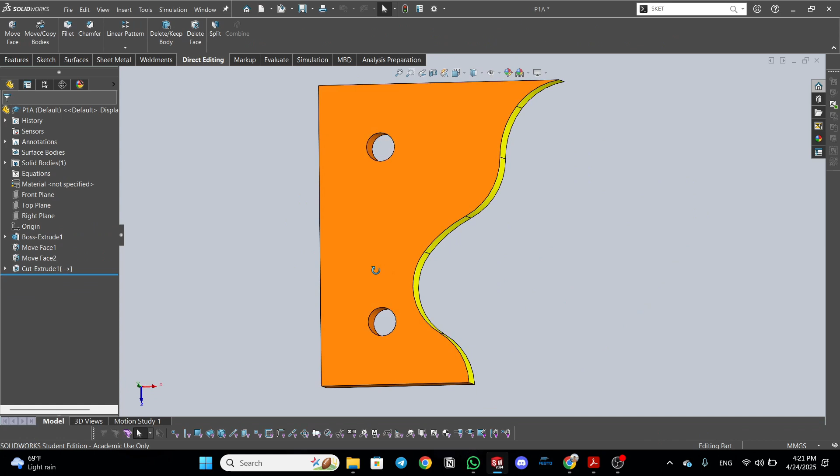Let's open this part, and we can edit the part in the assembly. Either way is fine, but I will open it. So I want to make all of these surfaces a single face. Let's experiment with this command, delete and patch, and see what it will do. It will not; delete and patch fails in this case. So it will not be valid.

So what should we do? There is a way to do it. Let's open the sketch itself. So there are different faces, or there are multiple faces because there are multiple segments in the sketch—this segment and so on. So that results in multiple faces.

So one answer for this is using the fit spline command. Fit spline makes multiple segments into a spline, which results in a single segment. Spline is a single segment, and you can make any segment a spline. So spline will do the job for us. Close the spline—it is not closed, it is open.

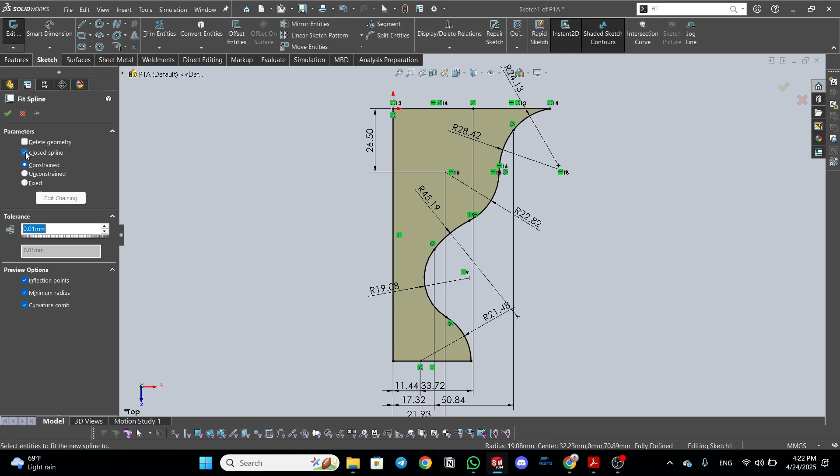We'll just select all the segments and click yes. Now we can see, if we click on it, that this is a single segment. Let's close it and see the face. It is now a single segment. Let's make it yellow.

So let's get back. Now, if we make the tangent command again, let's see if it will be okay. Very good. So it behaves the way we want.

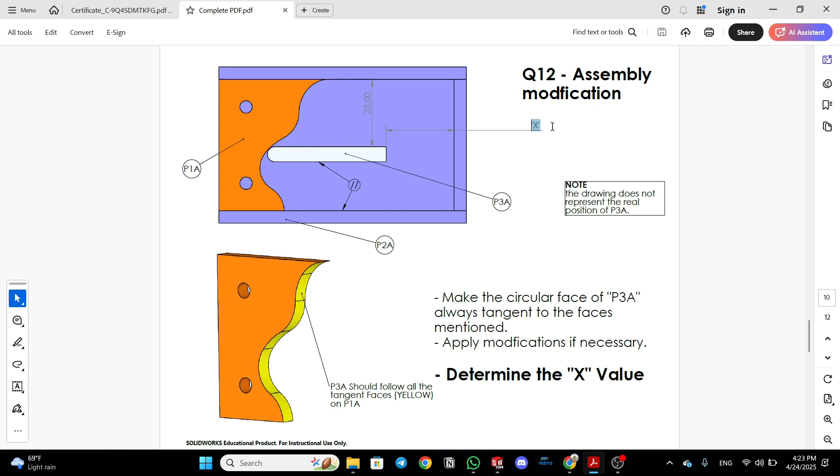So what is the question? There is a condition here: this face and this face have a dimension between them of 25 millimeters. Whenever this happens, check the value of x, the dimension or space between this face and this face. And he tells us a note: the drawing doesn't represent the real position of P3A. So let's see.

This is easy because we can add a mate between this face and this face, which is a distance mate, 25. And let's see from there. It is not in the same position, yes, and he tells us that it is not in the real position. So the assembly is fully defined.

Now we can measure the x distance it gives us. Evaluate measure that face and this face, and the answer is 29.6 millimeters. So this is one of the ways to solve this problem.

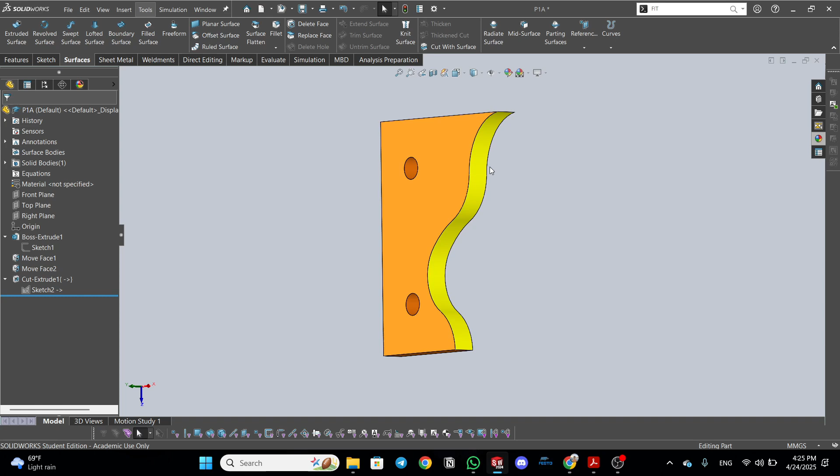There is another way, by doing surfacing, deleting the surface and redoing it by surface commands, boundary surface or fill surface. Either one will probably do well, but this is the fastest way, by using fit spline. So let's close this, don't save.

Very good, let's see another question. Assembly in context: sweep a hollow circle in the spline shown. Determine the mass of the pipe. So this is also a provided part.

We have to open it. Ah, so there's part, second, third—they are all mated together, or they are already made in the assembly. This sign indicates that these parts are in-context parts. They are made on the assembly, top-down assembly.

So let's see. There is a spline that is connecting between this cylinder and this cylinder, and we want to sweep a hollow circle on the spline shown.

Okay, let's get into the part. We are drawing, or we are making a part in the assembly, so we should make a new part on a plane, the front plane. It is in the middle. So: insert component, new part on the front plane.

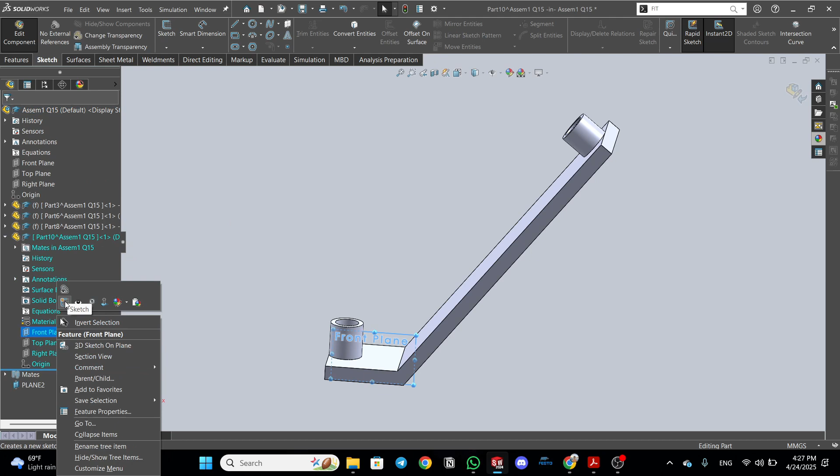So we are opening a new part, right? Yes, we are in the edit feature command. So we are in a new part. We can make a new part in the assembly: front plane, sketch. Where we should make this hidden, either by hidden lines or a keyboard shortcut. Either one is good.

So let's see. What's... oh, I hid the part accidentally by pressing tab. Okay.

Let's spline from this point to this point, and we can modify the handles.

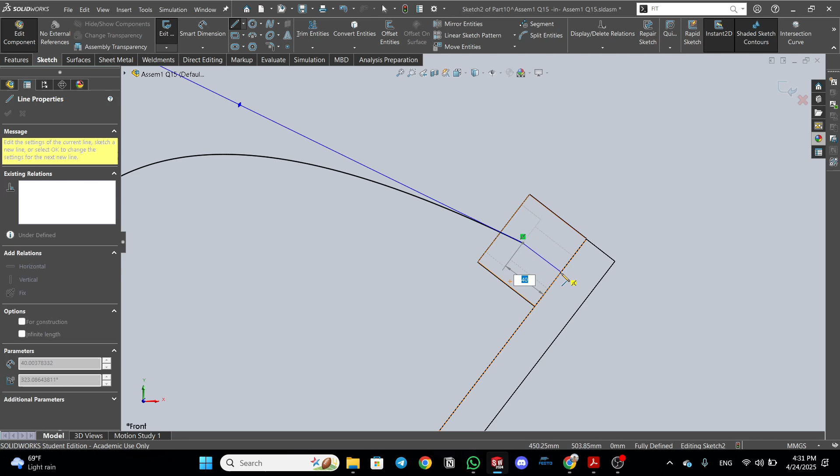But let's continue constraining the spline. This is tangent, it is shown here. If it is tangent, the spline is tangent with the axis of the cylinder, and here is also tangent, and the handle has a dimension of 500, the magnitude handle 500, and the only constraint left is the length. It is defined now.

Less than that, not perpendicular. It is defined. So I don't really know what was the problem, but it worked now. I didn't do anything different. So the spline should be defined.

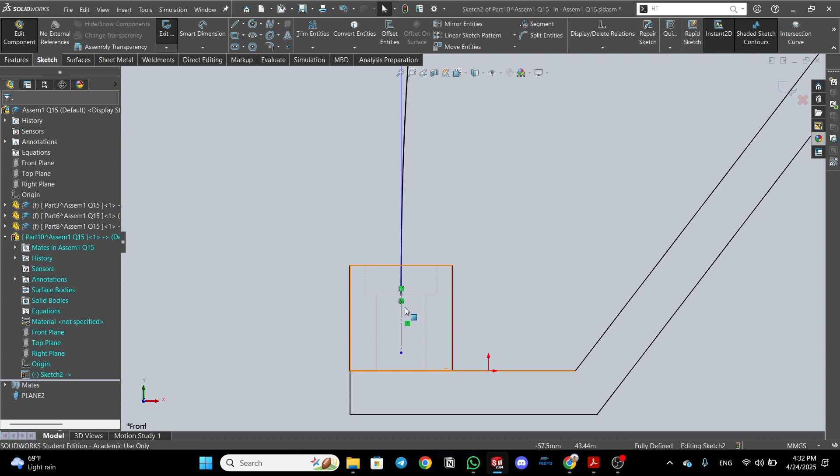So all he wants now is sweeping a hollow circle on the spline shown, and the hollow circle dimensions is the internal feature of this part. So let's draw, make a plane on this point perpendicular to the spline, and sketch on it.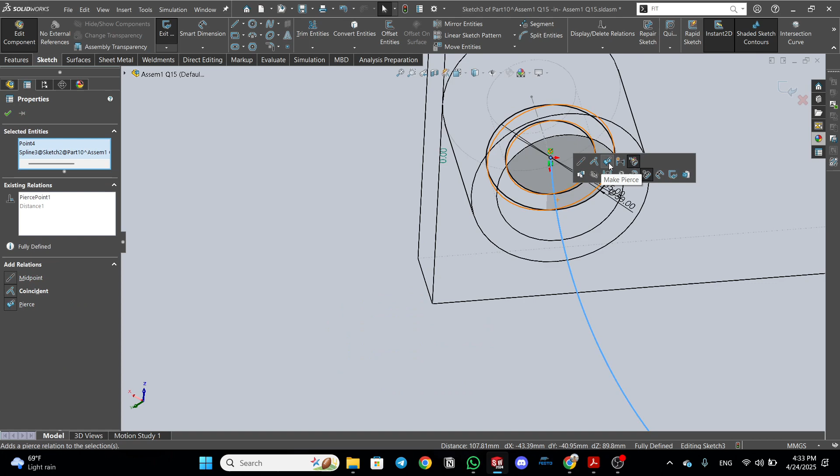Where's the plane? And sketch on it the circle. Here's 50 and 35, 50 and 35. And we'll make it a Pierce relation now. They are not concentric. These two are coincident, and this and that line are the Pierce relation.

This is good. Now we will do sweep, feature sweep, this path on the spline. Very good. Now let's get back into,

this is not tangent, it was tangent. It is tangent. It is modified now, I don't really know. There's sometimes when SolidWorks glitches, I don't know the reason, or no one knows actually, but it somehow behaves like that. Control B.

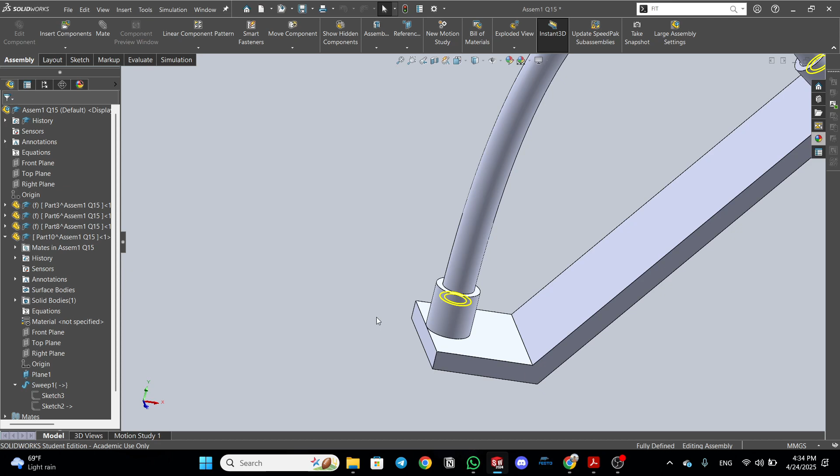And okay, now, so why is there a yellow, oh, whatever. So this is the pipe. It is fully defined now. Now he wants to know the mass of the pipe.

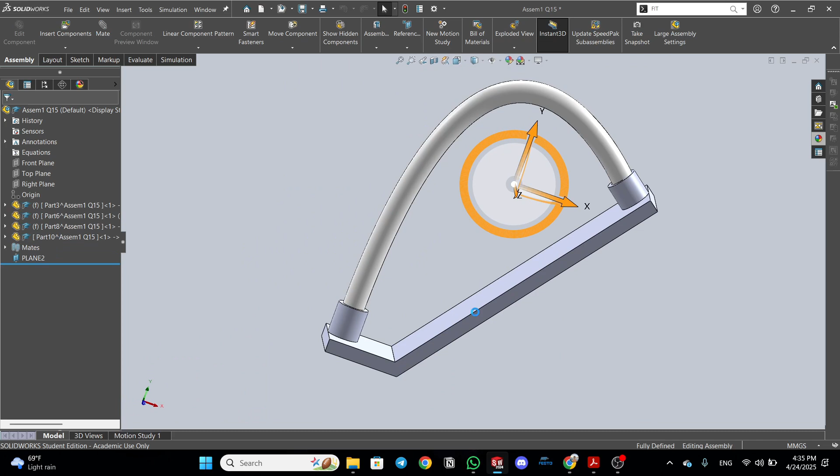And I didn't mention the material, so we can make an arbitrary one. Add material. Let's open the part itself. Add the material from it. PVC, PVC rigid. Very good. So either from the part or the assembly, we can measure the mass of the part,

which is 1288 grams. So this is for the part. It is an in-context feature. It is testing you if you know how to make a feature in the assembly, and if you know the steps and so on.

So this is the 11th question. One question left, which is sketch text. Let's see. So in sketch text, there is a C that is shown in the front view, and an E letter shown in the side view. So this indicates to us only one command, which is combine common.

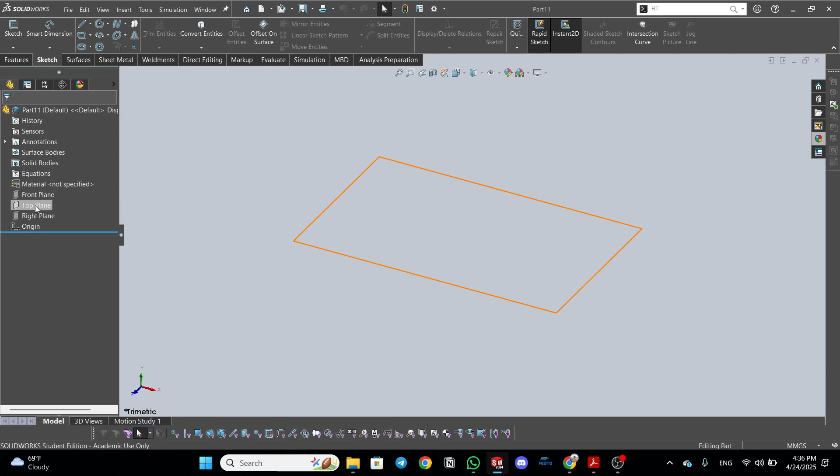So let's say letters are written using sketch text, 72 points the height. Okay, let's get into the front plane and draw a line and sketch text on it. It was C, and we can use a font or points of 72. Okay, it is downward, make it upward.

This is the first one. Now we can exit the sketch. We can sketch on the right plane, the same center line, and the other letter was E. This is the line we'll be texting or writing on.

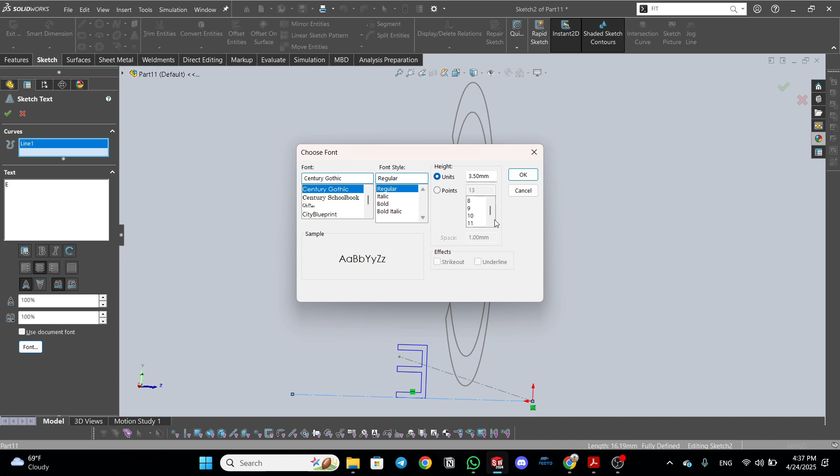E. Points 72. Oh, sounds good. So now we have to extrude boss these two. There isn't any dimensions because we're using sketch text, so it is fully defined.

This is the place of the part. It doesn't matter. So let's extrude boss base. Yes, letter. And extrude boss base this letter also. Reverse direction. And we have to unmerge the results.

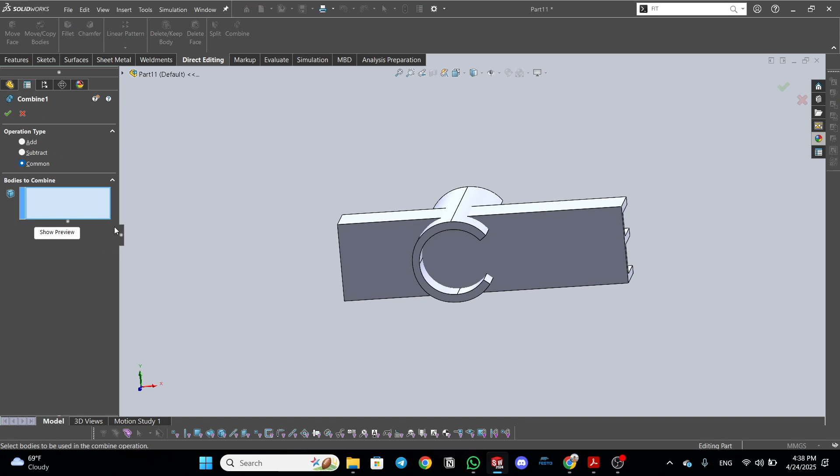So the trick here is using direct editing, combine, common. Common is combining the common area between two bodies or more. So let's select the first, the second, click yes. If we see from this view, it is C.

If we see from this, it is E. And we can also, if we wrote a letter that is Y or so, it will show us a Y. So this is basically combine common. It can do intricate parts by just combining two simple parts, and this could be one of the exam questions. And that's it.

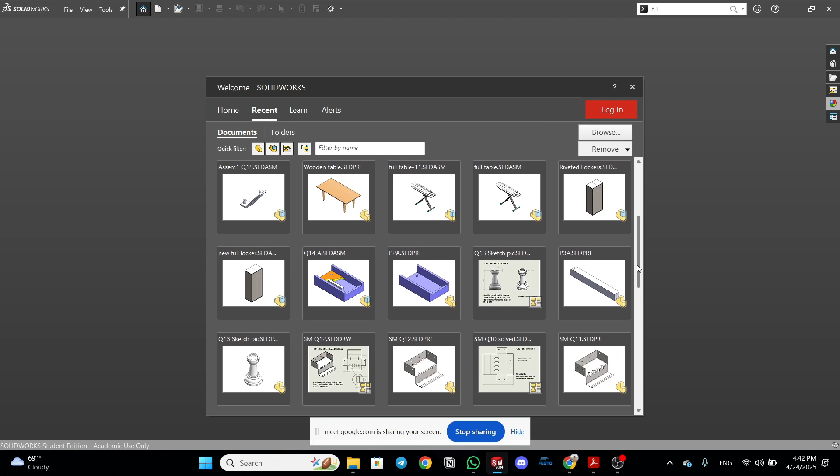Wait a second. Weldment cut list as a bill of material, or do you remember? We have a weldment, let's open. There is in one exam, yes, there is a question like that, but I don't actually remember the exact question. I took the exam like a year and a half ago, but there was a question like that. But I don't really remember the problem. If you have any details about it, I might help you, but I can't remember now.

I'll share it. Yeah, okay, it's fine. Actually, it was using the automatic option to organize the Weldment bodies into cut list folders, as in to organize Weldment bodies into cut list folders. I don't really know. I might revise my exam or revise the questions, and I'll continue.